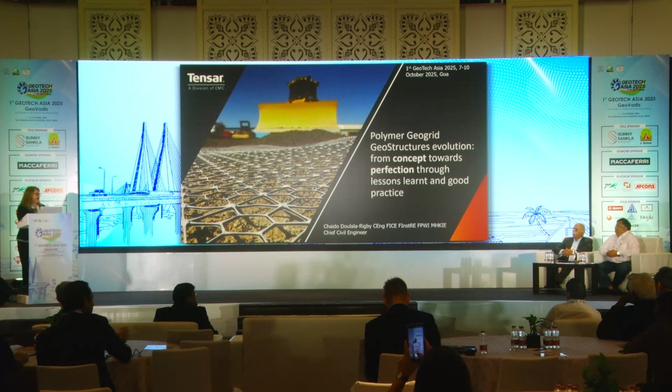So I'm going to take you from the beginning, where we started and where we are today. I'm a geosynthetics ambassador, I work for Tensar, and I have to mention Tensar because Tensar pays for my time being here. So let's go back to the beginning, from the concept of geosynthetics.

Everything we do in engineering, we mainly follow nature. There's an example of an aeroplane looking strikingly similar to an eagle, and another example of a submarine looking like a whale. Closer to our subject today, which is reinforcing or stabilizing soil, if we look at what the birds do, they stabilize soil with sticks of wood and twigs to make their nests.

So humans have been observing, and we started doing the same. We take clay, and in many parts of the world they still do that, reinforcing it with hay and sticks to create these bricks called adobe bricks, to build homes. In many parts of the world this technique is still available.

Of course all this concept of reinforced soil started way, way before. We have many historic examples of natural geoelements reinforcing soil. One of the oldest is the ziggurat walls in Mesopotamia, as it used to be called, in Iraq these days, where they reinforced loose soil with just reeds available in the area. Another example still in existence is the Great Wall of China, where some sections are also reinforced with branches of tamarisk to reinforce the soil.

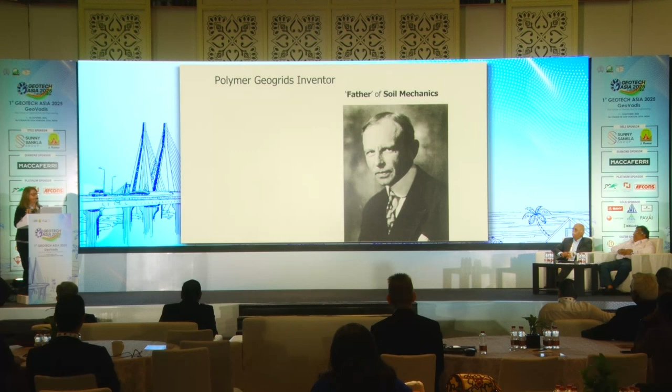I do a lot of STEM talks, and I go to universities to try to encourage students to use geosynthetics. The first question I ask students is, who is the father of soil mechanics? It's of course Karl Terzaghi, so all students know the answer. But when I ask who is the father of geogrids, there's silence in the room. So my purpose in life, until I retire and leave this industry, is to tell as many people as possible that the man of geogrids is Dr. Brian Mercer. This is a little bit of an unusual story.

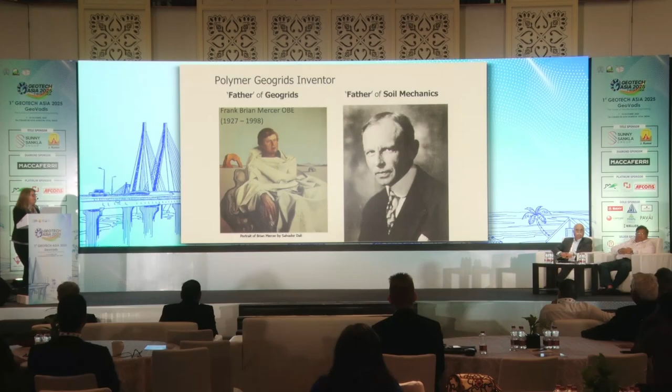Brian Mercer was a very good friend of Salvador Dali, and this is a photograph of the original painting that Salvador Dali did for Brian Mercer, I think 1973. Brian Mercer was elected as an honorary fellow of the Royal Society in the UK, and this is hanging in the room in Carlton Terrace in London, in a room named after Dr. Mercer, the Mercer Room. And this is a picture of Dr. Mercer with Salvador Dali talking about geogrids.

So, 1978, the concept starts - it's the very first, back in the day it used to be called the polymeric mesh, invented by Dr. Mercer. It was the first one, the square one, or biaxial, which now we see everywhere. This was invented in Blackburn, first time ever, by Brian Mercer - soil stabilization, SS.

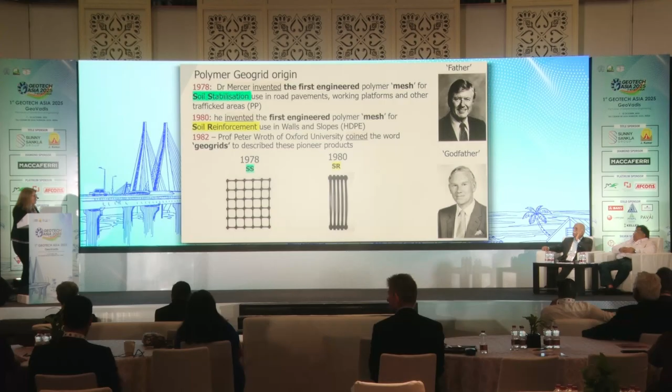1980 carried on, and then the second type of geogrid was invented, the uniaxial, with strength in one direction, for soil reinforcement. At this time it's still called mesh, because nobody knows what to call it. Then the godfather comes along, Professor Peter Wroth of Oxford University, and says, I know what we're going to call them - we're going to call them geogrids. So the name geogrid was given to the industry by Dr. Mercer and Professor Wroth from Oxford University, and I hope you didn't know that, so you'll take this away with you today.

So the title is The Origin, Evolution to Perfection. We've done the origin and evolution. So how did the uniaxial geogrids evolve? Well, there's nothing much happened to them - we just changed the length of the aperture to fit different markets.

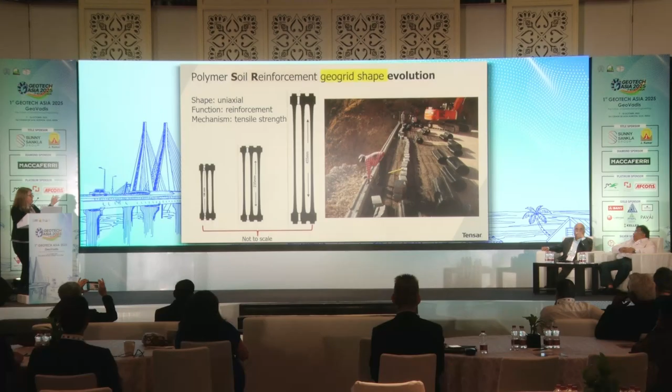Fast forward to 2010, and now we're building 60 meter high structures. This is a highway embankment in the Middle East, connecting Fujairah and Dubai, with a maximum height of 60 meters in three tiers, 20, 20, and 20. It's so big you can see it from Google Earth, and that's what you're looking at here. And if we look at the picture of this, is this.

How about design evolution? Well, the design evolution developed as well. In the 1980s, when we built the first structure, there was no British standard. The first design standard for reinforced soil structures, I believe, started in the UK with BS 8006, for whoever is familiar, but it was only published first in 1995, and now we're down to more revisions. Other countries adopted or altered the code to fit their market - so we have the Hong Kong GeoGuide 6, the American standards, Australian standards, and also the Indian standards on reinforced soil.

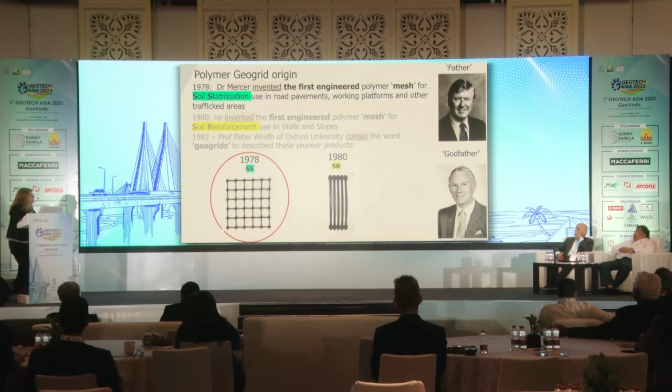So that's reinforced soil. How about soil stabilization? How did that evolve? Well, that's a different story. When we first - I was not with Tensar back in the 1980s, I was still at school - what the engineers did, like every engineer, was look for the tensile strength, because that's the natural thing to do. So of course we tested for tensile strength and put this in the standards. I believe many DOTs in America still use tensile strength. But in parallel, because this is mainly for traffic applications like roads, working platforms and railways with dynamic cyclic load, we thought let's follow what AASHTO does and try some trafficking as well.

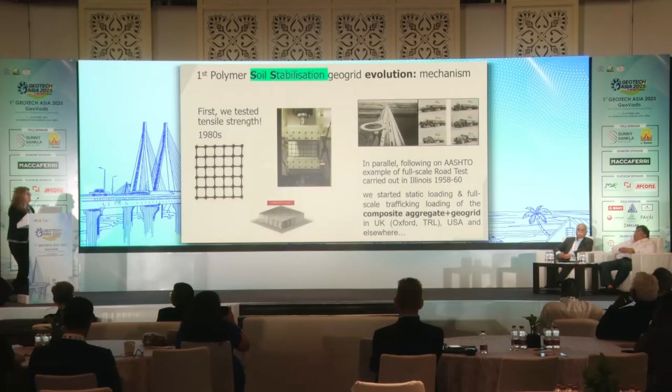Let's try to see how the composite aggregate and geogrid behaves. Since the beginning to now and beyond, because we're still developing, evolving and learning, our geogrids have been tested in many parts of the world. So whatever we say is very well documented, and that's how it should be. Innovation and evolution is very welcome, but it needs to be backed by very rigorous scientific justification. And in many parts of the world, this is the current research we are undertaking.

The lesson we learned, it's more like a discovery, is that soil stabilization mechanism is different from soil reinforcement. The inventor of geogrids knew that from the beginning, that he had two different products. Soil reinforcement is about tensile strength, whereas soil stabilization has to do with shape, geometry, and the ability to interlock the aggregate.

As we developed and evolved, we realized that wheel loading, mainly for trafficking applications, follows a 3D radial distribution. So we thought, what if we develop our geogrids to a shape closer to a circle, the perfect stress distribution? That's how we came up with the hexagonal geogrid in 2007, evolving what our inventor started.

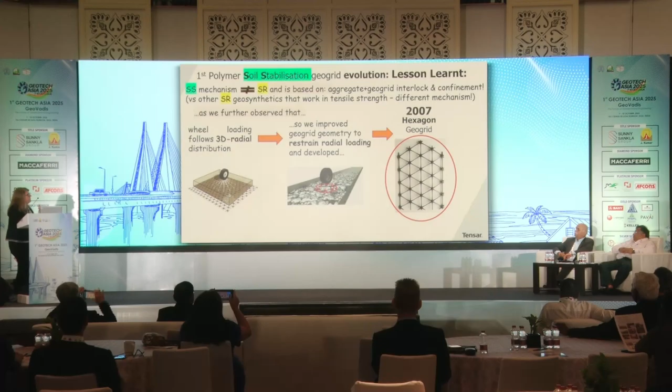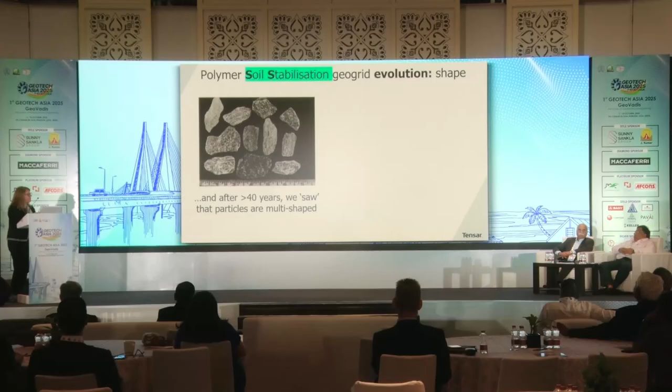But we carried on observing, because we keep on learning, we're not there yet. It still surprises us what these products do. After 40 years of R&D, we realized the particles of the aggregate are all different shapes. So we thought, what if we give different shapes in our geogrids? That's how we evolved in 2021 to the next generation geogrids with multi-aperture structure.

By enhancing the geometrical compatibility, we enhance performance. The evolution of this type of geogrid is from biaxial to multi-axial to multi-shape, and who knows what's next, because there's always something cooking in the back burner of Tensar's lab. There's more coming, because we're still in the journey of understanding what our products can do, or what our future products will do.

And why do we do that? Because the main purpose is to increase aggregate confinement and interlock, because we realized that's what matters, ultimately to increase performance and value.

Just a quick example of what value means to us. This is a crane mat somewhere in the US. I won't go through the details, all you need to know is the conclusion. At the time it was the third biggest ringer crane in the world, I believe. This was the cover page of our first e-bulletin of the ISSMGE.

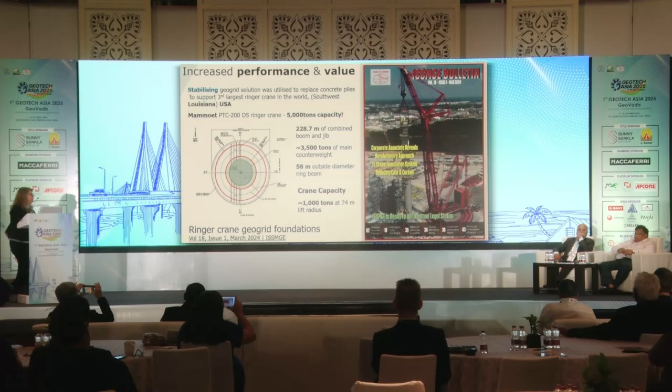The conclusion is that with geogrids we replaced 200 piles, 20 meters long. This was a temporary working platform for a crane, and the conventional design called for 200 piles to support it. We eliminated all 200 piles with just 5 layers of geogrid and a 1.8 meter mattress.

So what does that mean? Carbon is one thing, but money talks, right? Money is the big daddy. We saved the contractor 3.1 million. This is done and dusted, that was in 2017. We did it, and there's a paper for whoever is interested.

So, to the conclusion, what have we learned towards perfection in practice? I'm going to give four examples: reinforced fill, compaction, site investigation and foundations, and drainage scour protection. I could talk for hours, but I'll concentrate on these four.

Reinforced fill: our structures are a recipe, just like anything else. With reinforced concrete, if it's C40, you have to give the correct amount and type of Portland cement to reach C40. Our structures are no different. So here's a reinforced soil bridge abutment, an integral bridge.

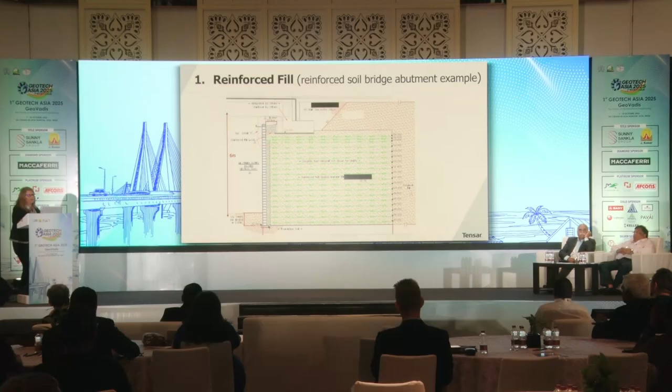Mitchell, the mastermind, my colleague, designed this: 6 meters high, very conventional. We're fighting the industry to adopt reinforced soil because it's so much cheaper, easier, and carbon friendly. We specified the reinforced fill because it's a bridge abutment, so we need the best fill available: well-graded granular, angle of friction of 42.

What do you expect to see on site? Something like this, very good quality aggregate. What do we see on site instead? This.

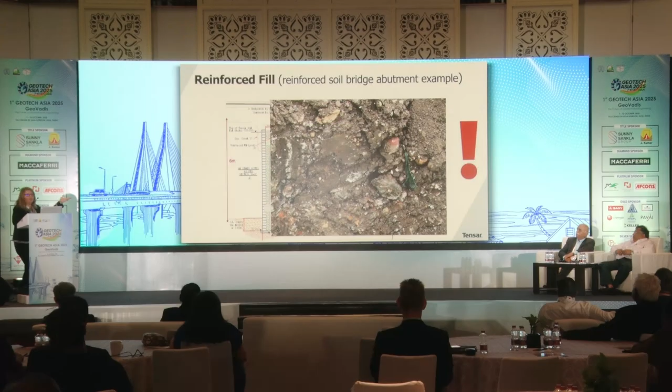We had to raise our voice, and it was shocking because the specifications were clear. This is a project in Great Britain, and the specifications were not only not followed, it was incredible that they would provide this as granular fill to meet an angle of friction of 42. Thankfully we found out and raised our voice. Lesson learned: if it doesn't look right, it's probably not right, speak up. We're a small manufacturer and provider, and we have to deal with a big contractor.

And there's always this disclaimer to say 'filled by others.' It doesn't matter, it's still our design, and we've got the professional duty to warn. Whether it's within our contract or a caveat of exclusion, we raise our voice and say stop. Thankfully, that's what we did. Lessons learned: follow the specs. Like I said, it is a recipe.

It was demolished and rebuilt with the proper spec. So I shouldn't complain because Tensar got twice the sale, but that's not my point. My point is we don't want any of the structures to fail. We want to do the right thing.

Compaction. Everybody knows why compaction is good, but I'm going to give you a different angle. So this is during construction. Accidents happen, and we know that. This is part of the big walls I mentioned, and right at the boundary where the new contractor took over, they don't care about our structure, so they're quite rough.

So what happens? This big boulder falls down, and imagine we're 40 meters down already - no, about 50 meters down. The impact of this boulder, which is about 4.5 by 3, is massive. So what did it do? It created a big hole.

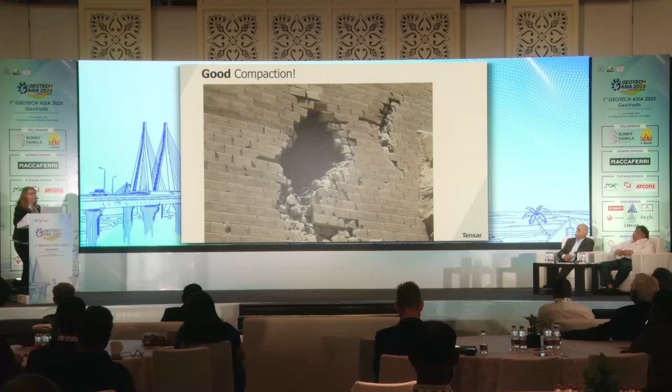I don't know if you can clearly see the geogrids and the soil. The geogrids are doing their work, and they're doing it perfectly because the construction in this project was perfect - the face of the soil is vertical. But of course we need to fix it, because the concrete blocks are just there to protect against long-term erosion. So what did we do?

We built a buttress in front of it. So this is the buttress - we plug, and this is the end of the buttress. This is the before and after. It was a very neat solution. This buttress is 10 meters high. Yes, we can fix it because structurally the wall had nothing wrong with it. And of course we made it look pretty as well.

What happens when compaction is not there? There's another photograph that landed on my desk saying, can we fix it? What do you think? If you look closely, you can see the sun coming through because there's a massive hole all the way to the top. Clearly, all the granular materials and drainage just poured out - that tells me the geogrids must have been missing. Never mind, no compaction - so compaction does matter.

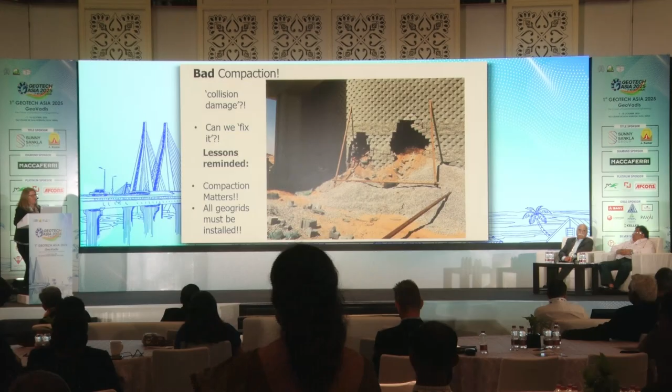The answer to that was no, you have to demolish it and start again. That's the only solution. All geogrids must be installed, and compaction does matter.

Site investigation and foundation - here's another example from somewhere in the world. Doesn't matter, it's a 12-meter high wall, dimensions in centimeters. In this part of the world, the site investigation is done by others and given to the geogrid designer - so no control. Slope height 12 meters, face angle 60, the SI undertaking had no boreholes for a 12-meter high structure.

Just a few trial pits finished at 2 meters, and they found silty clay and no groundwater. Happy days - they gave the bearing capacity, and the wall was designed for what it was given. The only foundation remediation was where the trial pit stops: excavate and replace 2 meters. What have they missed? Well, obviously, they missed the groundwater level, which was just below.

And a very, very weak soil layer with the consistency of plasticine - like a kaolinite seam or something. So what? Well, take a closer look. This is the actual embankment, which was to carry some electrical equipment. It looks beautiful and perfect, but what's going on there?

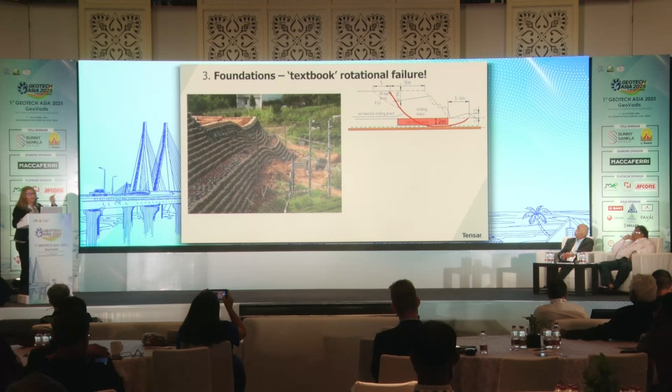Take a closer look - the whole thing is slumping, and you can see the slip circle. I call it textbook failure - exactly what you'd expect to happen. Of course, they remediated the foundation, excavating and replacing the 2 meters, but they missed the weakest layer. That's exactly what happened.

So there's the crater at the crest, 3 meters down, and then what happens as it goes down? It comes up - sorry, there's another one, good scale with the people. The toe comes up, right? The bulging at the toe was about 1.5 meters. Like I said, textbook failure. And of course, water was the culprit of it all. So what happened here - they had to take that away and replace it.

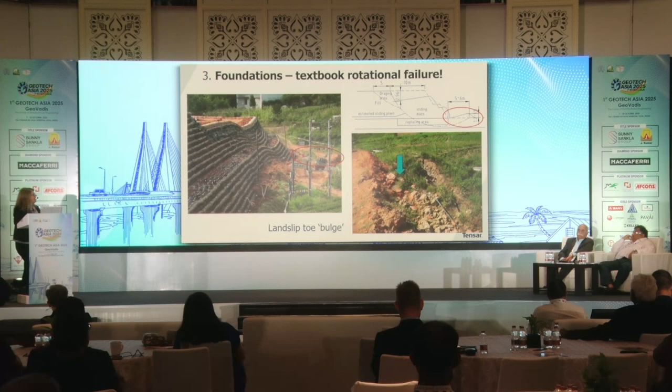Lesson learned: carry out appropriate site investigation. It needs to be proportionate to what you're putting on top to support - not just shallow trial pits for tall structures.

Carry out appropriate foundation - it's not one solution fits all. It needs to be bespoke to your structure and your geology every single time. Many people say you're going to pay for the site investigation at some point of the project. The best time to pay is at the beginning, because if you pay afterwards, it's going to cost you a lot of money, and sometimes it might cost lives too.

So please, don't skip site investigation. One last comment: drainage. Why is drainage important? This is an extract from the British Standard - it shows that drainage must not daylight, it must be buried under the soil. So we always put the end of the drainage at the top, buried at least half a meter below the surface.

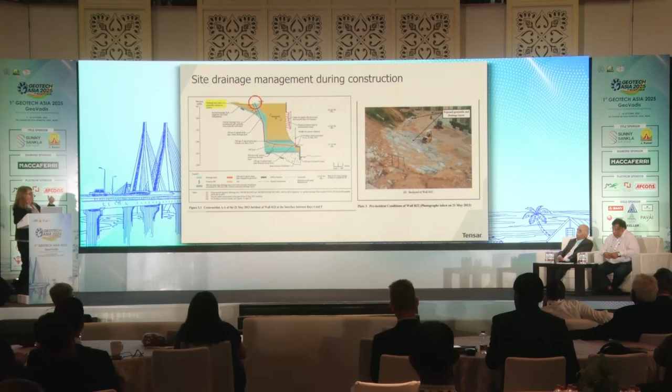Why? This is a well-published case study from Hong Kong. This was during construction. They stopped for the weekend, a typhoon came, but they didn't cover the drainage. So this drainage at the top acted as a funnel, taking in all the rainwater, and because the foundation was concrete, there was not enough drainage for the water to go through. So this is what happened.

It popped the face, and the conclusion of the report said the surface water accumulated at the drainage was the reason for the failure. So the lesson learned: consider drainage at all stages.

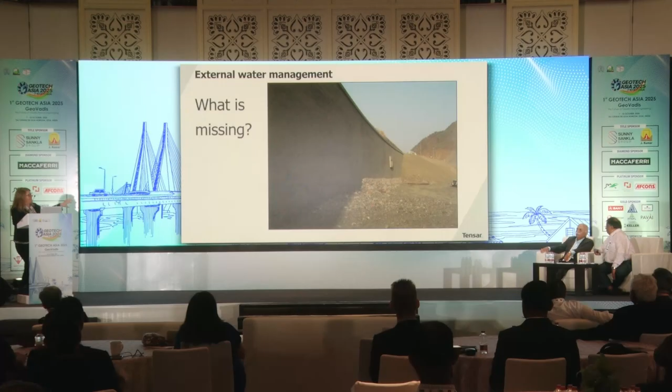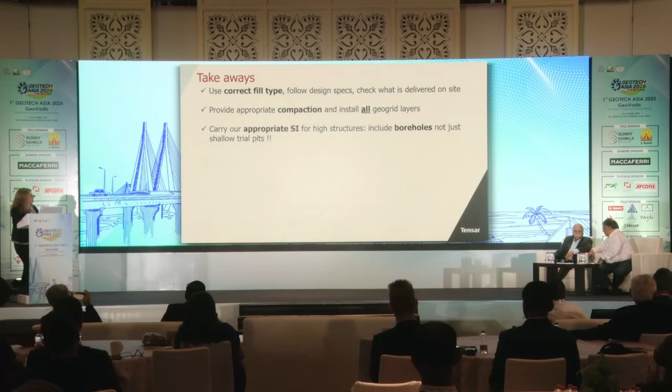And finally, be open to learning and keep an open mind towards foundations, because evolving towards perfection is a lifelong learning journey. As our civilization - because I'm Greek, so my civilization is as old as yours - in Greek we say 'gerasko aei didaskomenos', I grow old always learning. I cannot read the Indian, but basically your Gandhi said, learn as if you will live forever and live like you will die tomorrow. So in essence, never stop learning, because knowledge has no limit.

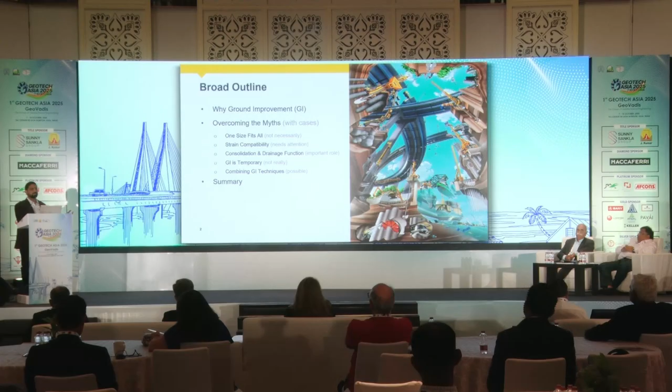How important it is to have strain compatibility in design of the ground improvement techniques. The consolidation and drainage factor is also one of the very interesting aspects for the full-fledged performance of the intended design. Ground improvement can be designed as a permanent solution, not temporary. And of course, sometimes you have to combine techniques to suit varying soil demands and geotechnical applications. So I thought to cover some of these aspects, but also give real examples to substantiate through case studies.

I'm sure you're all aware of this fundamentals of ground improvement. It's all about controlled alteration. It's not a product to make things happen in the ground, but it's all about the controlled alteration. And of course, the response is what we want out of the engineering actions. It's not textbook actions, because ground improvement is more theory of practice than textbook formulas.

You can see some of them are all basically connecting to the basics of physics. Sometimes it's consolidation, sometimes it's modification chemically, and sometimes as simple as densification when it comes to vibro compaction, and the reinforcement, very commonly known as vibro replacement or vibro stone columns. And of course, there are other techniques.

In the flow chart, what we believe in Keller is the whole thing is like a life cycle of the project. Right from the design intent, you have to understand the geotechnical complexity and problems involved. When we get into the design phase, you have to take into account even availability of materials, constructability, and what time is given, what rigs are available in the market.

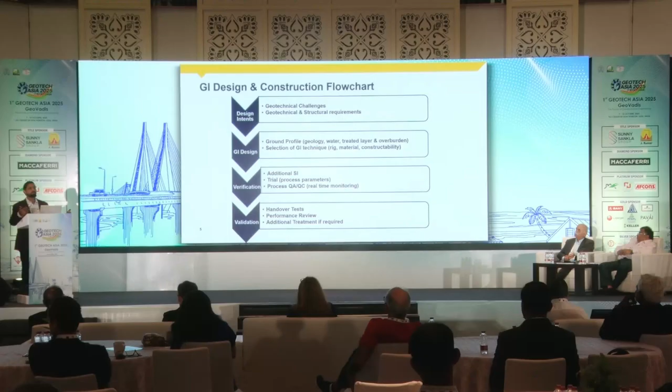So some of the myths, I wanted to break those myths and try to attempt in this session, and try to bring those myths connecting to the facts based on real case studies. The common myth is like, again, I just wanted to cover all these 5 topics.

It's not that one technique fits all geotechnical problems. You need to have the right technique. For example, even as simple as the densification technique - the right technique in terms of depth, in terms of fines content, and the strain compatibility when it comes to discrete elements. That's very important when it comes to slope stability and liquefaction applications.

Drainage, whatever we wanted to achieve through right consolidation, the drainage aspect can never be ignored, and how it can be designed as a permanent solution, not just temporary, and sometimes the combination of techniques.

The first one, touching the first top 2 rows. We do a lot of reclamation projects in Southeast Asia. In these projects, we have to ensure the fines content, how clean is the sand, what is the calcareous content sometimes that you have in reclamation projects.

You can actually decide on vibro compaction or dynamic compaction, depending on the depth, depending on the water table. And when you deal with soft clays, you also have to take into account whether sometimes there is any organic content and decayed wood. That is also important when you choose to have a reinforcement technique like vibro stone columns, or sometimes you have to go into deep soil mixing.

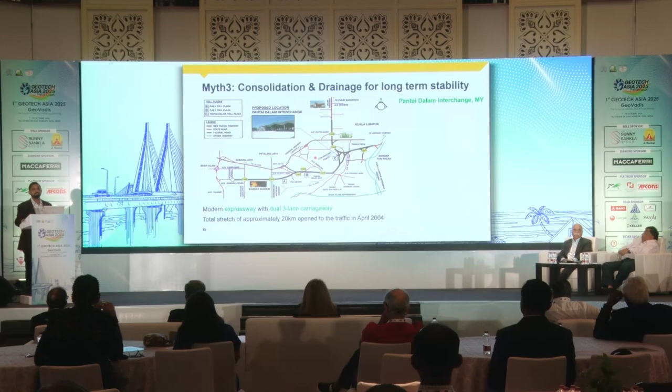Moving on, the next important aspect is the drainage and consolidation application of soft clay behavior. When I was a young engineer in Malaysia, back in 2004, this case has been there for the last 20 years - a very interesting case study for us. This is in Kuala Lumpur, and the soil here is called slime. Slime is nothing but very soft, ultra soft silt with some sand content, but very soft. Shear strength sometimes goes as low as 8 kPa, and maybe as high as 25 kPa.

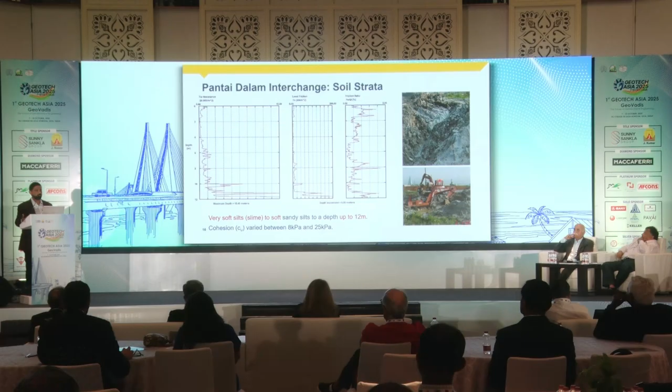You can see how badly even a 20-ton excavator sinks into the ground, so you cannot take that kind of weight. Now imagine putting a huge reinforced soil wall, 13 meters high, for this interchange - how is this going to work? We're talking about 260 kilopascal. It's just not possible without the right soil improvement, ground improvement technique.

So what we've done is optimize the elements with closer spacing and a higher replacement ratio to address slope stability, and you can optimize at the center of the carriageway of the highway since that's more about settlement - being an RSW, you can tolerate even 300 millimeters of settlement as long as it's constructed rightfully. Stability is then ensured with the right factor of safety of 1.4.

But what's more important is the drainage layer. The drainage layer ensures the right consolidation behavior of the soil as it gets filled. This is a very interesting instrumentation monitoring program, run for almost 3 years.

What's very important even in the construction phase - for 13 meters, we took 13 weeks to build the embankment, that's almost 1 meter per week. If you accelerate this, trying to get it done over a 1 month period by building 3-4 meters every week, that can also cause a lot of problems to the soil.

So it has drainage elements, drainage layers, all nicely connected. But you need the right sequencing of construction to ensure the whole performance is achieved in the rightful direction. And you can see the wall still performing nicely for the last 20 years, since 2004 - a 13 meter high RE wall working very well.

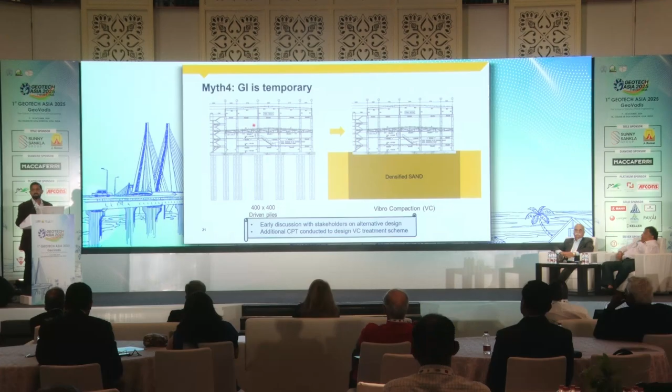This one is very interesting, a rubber factory in Jurong Island, which was originally designed to have driven precast piles. We converted this into a vibro compaction technique because we found the sand, though reclaimed, was good enough but not having the right densification.

At the client's request, we monitored this for about 7 years, and the whole factory was found to have just 32 millimeters of settlement after the right densification of the loose sandy deposits. The factory was designed for a raft performance settlement of 50 millimeters, so we changed from a very expensive piled solution to a ground improvement solution.

The last case study I wanted to touch on is about sometimes getting into surprises with soil. That's why it's very important to have confirmatory soil investigation for every ground improvement project, or every foundation application per se.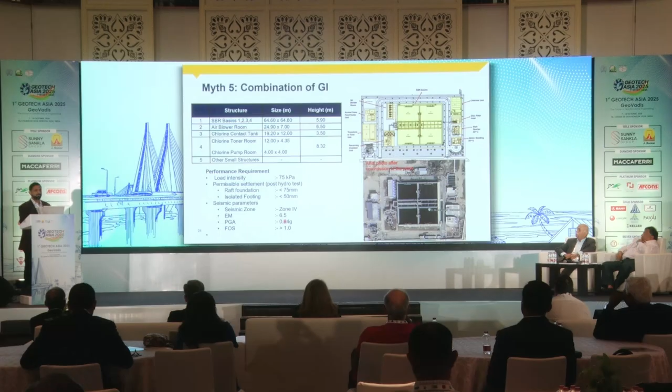I'm not going into the details, but the main application is liquefaction mitigation with 0.24g and a magnitude of 6.5, and how we actually validated the soil confirmation. At the tender stage, it said the liquefaction depth was only 10 meters, but when we did the confirmatory soil investigation, the liquefaction depth became 17 meters.

Sometimes you are in a design-and-build or lump sum contract stage. How do you deal with this? One other interesting thing we found was that unlike the top 6-7 meters, which had higher fines content around 20%, the bottom was relatively clean sand, river deposits from decades of sedimentation.

We wanted to optimize by combining techniques rather than sticking to just one, because a varied soil profile complicates your geotechnical design, but it also lets you optimize the solution by combining two different techniques.

So we used vibro compaction at the bottom layers, like the bottom 10 meters depth, where there's less fines content, suitable for a densification effect to address liquefaction mitigation. But at the top, where fines content is more, we used vibro stone columns, because one solution doesn't fit all problems. You need to switch to vibro stone columns where the fines content is higher, which causes more reinforcement effect and good enough drainage to mitigate liquefaction.

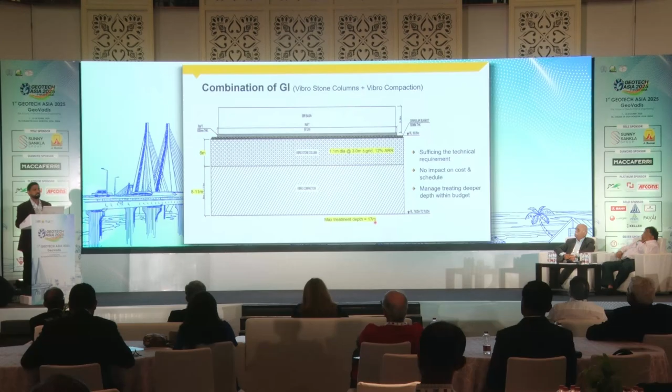I'd like to summarize now using these case studies to bring some facts and break the myths of some of the misconceptions we face in day-to-day life. Firstly, ground improvement is just not one size fits all for geotechnical problems. The complexity and variability of the soil, and different performance criteria for different structures, place different significance on the geotechnical design. So we need to engineer the solution and not assume one product fits all problems.

The second point is that focusing on addressing strain compatibility becomes even more critical. If you're transmitting all the loads through deep foundations, strain compatibility may be less important, although even there you need soil-structure interaction compatibility.

But here, discrete elements, sometimes rigid elements can be rigid inclusions, can be deep soil mixing, especially for applications like slope stability or liquefaction-induced mitigation problems. Then you need the right overlapping techniques, the right grids, and the right understanding of the complex design before execution. Then it is possible to combine different techniques to suit varying soil conditions, giving leverage on optimizing cost as well as time.

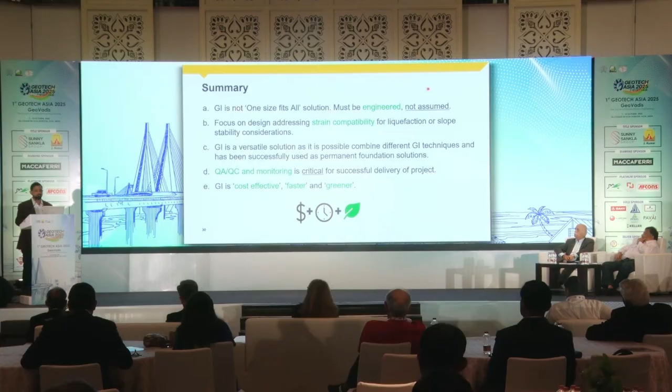Overall, I conclude by saying ground improvement can be cost effective if you design it well, faster compared to conventional solutions, and it's greener by having the right carbon savings. Thank you very much for your time.

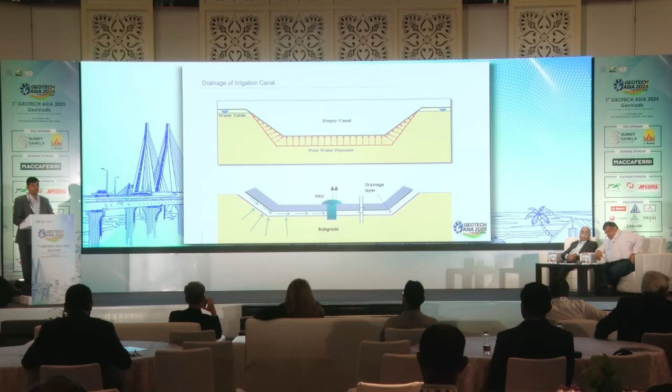A canal is of course a very nice structure, but in case you have a high water table and an empty canal, you have issues with linings—this was the case in the states of Punjab and Haryana, since those are the two states with the biggest canal irrigation system. Usually we provide a drainage layer at the bottom. Or, as we're talking of ground improvement, you have excess water, pore water pressure, or sometimes we need to build the structure on it—so strengthening plus drainage, both parts need to be taken care of.

Landfills, of course, involve draining of liquids as well as gases, which is part of your bottom lining system or top lining system.

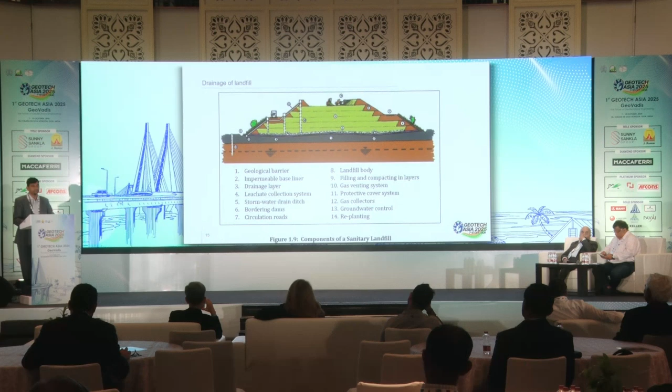Pavement granular surface layers, be it a flexible or rigid pavement, can have a daylighted granular surface, or you have situations anticipating a lot of floods where you want to keep your subgrade dry, so you go with conventional open drains or trench drains built with gravels. In case stagnant water and fluctuation means capillary rise cannot be avoided, the conventional solution is placement of sand, typically 150 to 300 mm, which will cut off the capillary rise.

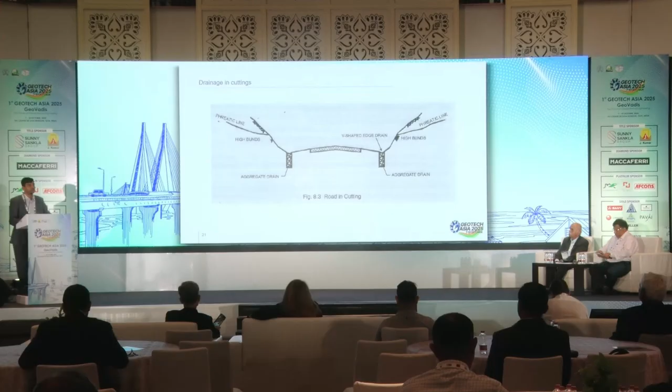Or you have a situation where pavement is in a hilly area, again rising groundwater is an issue. You have trench drains, typically in cuttings, especially in the Himalayas or Western Ghats, where you have constant sinking and pavement issues because of the phreatic surface being cut. Sometimes we have infrastructure close to irrigation canals, and there too you have these issues.

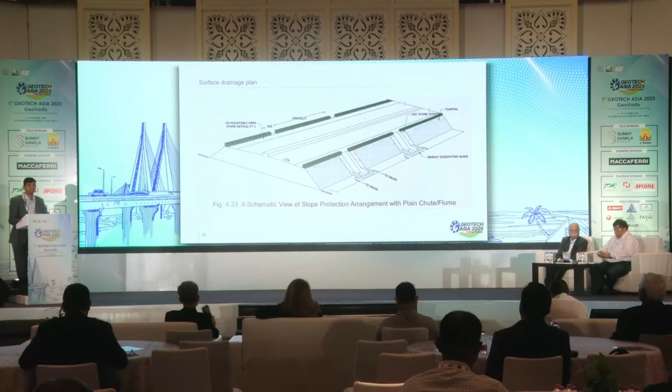Apart from subsurface, there are surface drainage measures using chute drains, something like this when nicely done. Even big structures like dams, small or big, use chimney drains. These are some pictures from the International Geosynthetics Society showing multiple applications of geosynthetics as part of drainage.

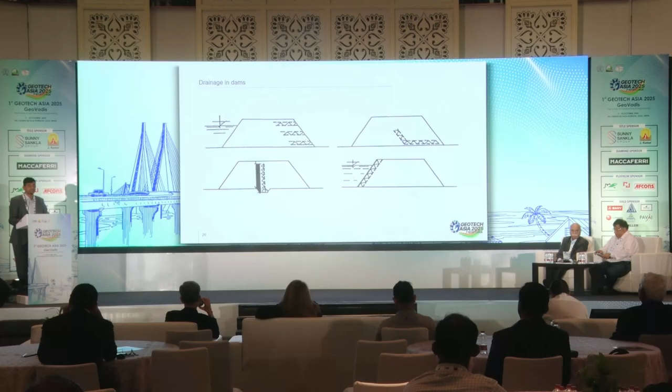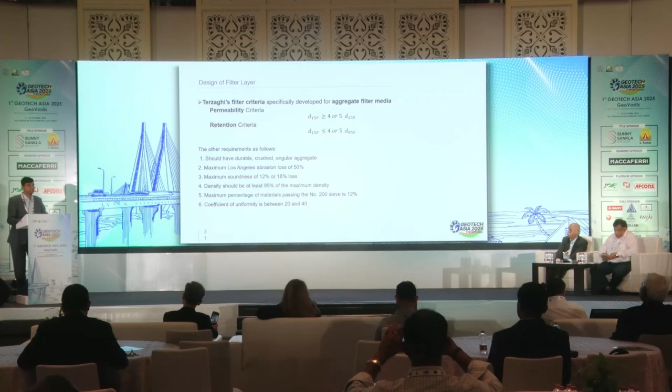We will dwell on what these mean - hand-packed boulders and well-graded layers. I think we need to go back to basics when we talk of drainage. We know the filter layer, how to design it based on the base layers or soil available. Nice designs can be derived based on D15, D85. Then you have curves where you can look at the gradation of the base or core material as well as suitable filter material to choose. I am not going to go into the design of this.

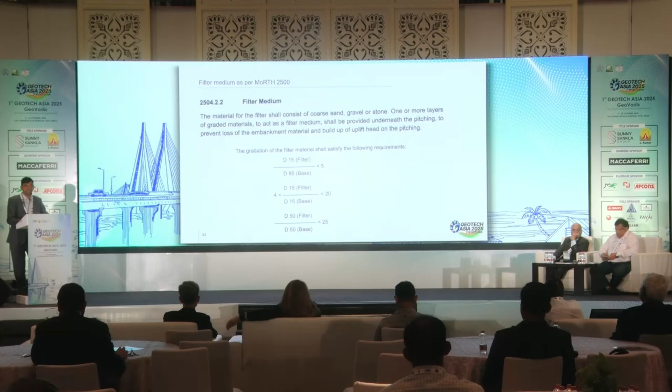My point is, even if you do all these calculations, what it needs is a drainage layer having certain gradation placed in a certain pattern - inverted drainage layer, sometimes open drainage layer, depending on what type of soil you want to retain. Then, of course, you have curves for textiles where you can look at the opening size and derive it.

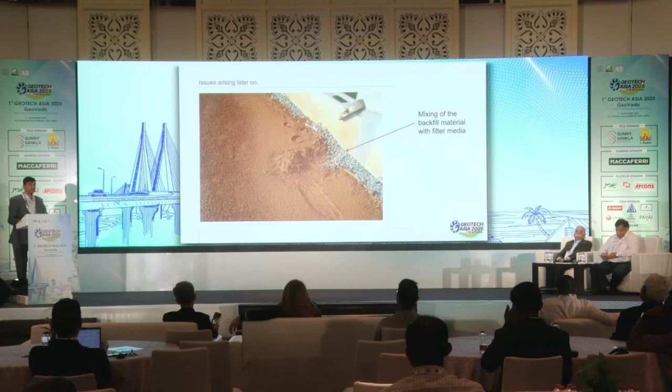But how often have you seen installation of a drainage layer with the gradation that was actually designed? At least, unfortunately, being a civil engineer, I need to admit, in the last two decades I have not seen this done so seriously. Some portion it's being done, and some structures I have personally seen how it's done. Most of the time you will end up with something like a single size drainage layer being placed with the soil, and what the life of this drainage layer will be over time is to be seen. On top of that, there are issues of banning mining for sand and gravel, specifically happening in India in certain parts.

So when it comes to solutions, drainage composite is one option, where you have a product with a textile, a drainage core, and on the other side maybe another textile or a membrane. The functions it performs are drainage, apart from filtration, separation and protection. You can have variety of drainage composites with only one side textile, both sides textile, or one side geotextile and the other side membrane. The reason I put these basics is I have seen in university sometimes people using only one type of drainage for many applications.

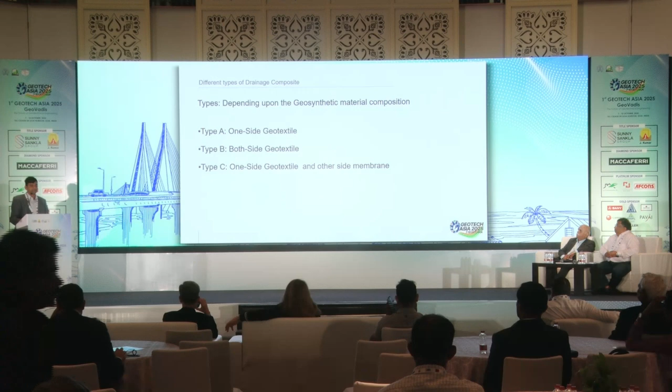Subject to whether you have a proper geotextile or a proper conventional drainage being designed. When we look at the conventional method and the geosynthetic drain, we are looking at criteria like...

Graded filter: in geotextile, you can actually customize, you can manufacture the textile by choosing the apparent opening size. Whereas in case of conventional filter, you can do it, but you will need to construct it that way. Quality, of course, depends on the source from where you are mining the minerals or the drainage layer.

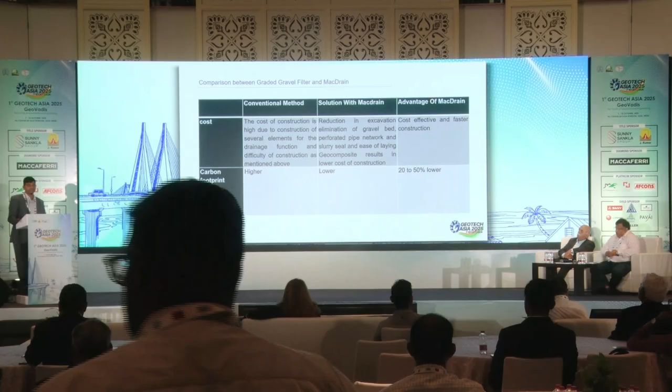Geotextiles are a part of polymeric materials which you can consistently build, and ease of construction is very easy. Cost, obviously, from different states and parts of India, we have seen it can range 20 to 40% very easily. And carbon footprint of this solution is very low.

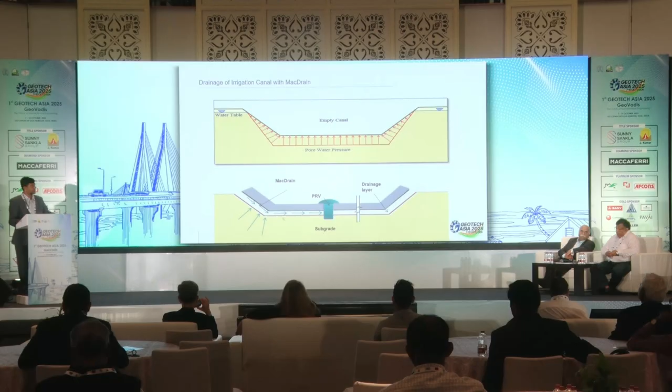This is one case of a canal where you can provide a drainage composite at the bottom, especially critical when you have a very high water table and possibilities of cracking of the canal lining.

Or PVDs, as a replacement of conventional sand layers or gravel layers. Or you can use a geocomposite in the pavement layer, especially for areas even for frost susceptible soils. Here you will need a slightly different drainage composite compared to other locations.

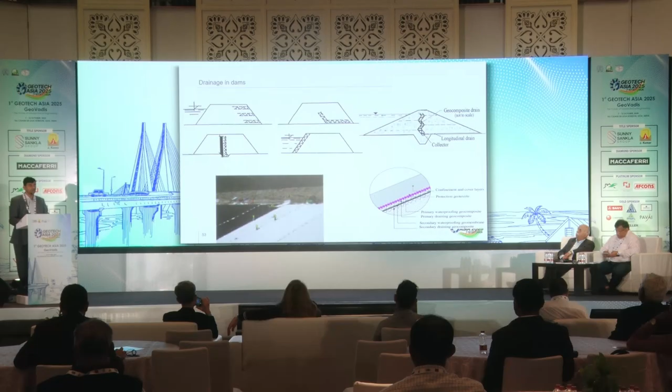Or you can look at drainage composite for cuttings. All these sketches I am showing are part of the norms and guidelines now in India. Or if you have a cut and cover tunnel, you will need to provide a drainage composite on top. Retaining walls, of course, would be one requirement to design for these applications.

When it comes to the application of design, whether it is landfill where you are dealing with leachate, or retaining wall where you are dealing with natural soil and water, or pavement, the applications are different. So here we will first need to understand these boundary conditions and then design.

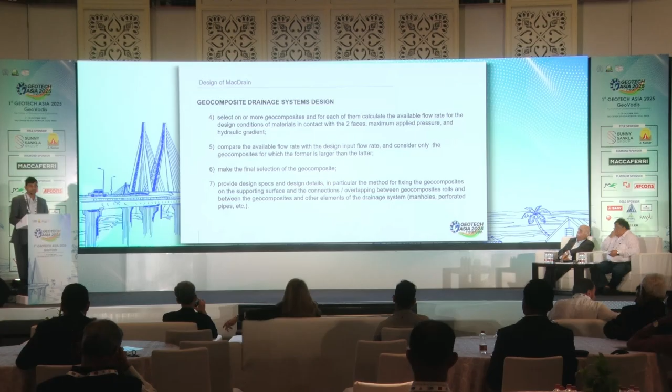Here you can choose the drainage composite based on the flow rate, and when we talk of the available flow rate, we will need to see the conditions through which it's going to be subjected, with a design like what you will see.

I have just put one simple example of a retaining wall. In case you want to estimate how much flow it will accumulate at the top, you can just go by first principles of equipotential and flow lines and calculate the flow. The drainage composite or geocomposite drain must have a higher capacity than what the flow is expected.

Keep in mind the drainage composite needs to be compared with the conventional option, maybe based on the type of gravel you want to put. Take the K value, and Q equals KIA, from that you can calculate the flow.

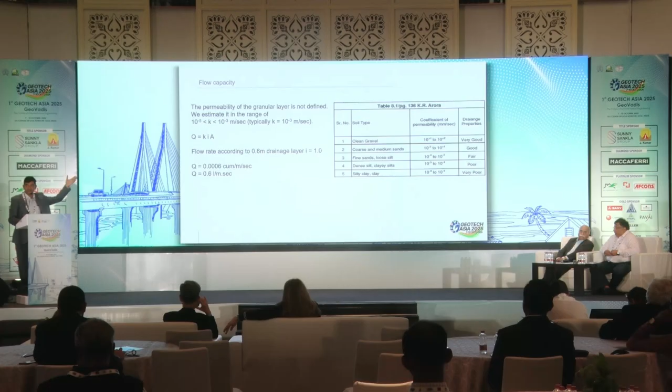So for example, if you take a 0.6 meter drainage layer, as specified in various norms, and let's say a vertical wall with a gradient of 1, maybe 0.6 liter per meter second is the flow you are looking at. Now for arriving at the flow capacity, you can choose a drainage composite with a testing as per ASTM or EN ISO.

You will get a flow which is determined from the laboratory. You say the QL is the flow from the laboratory, and then you will need to understand the available long-term flow. The long-term flow will depend on the life of the structure.

So the question will arise, how does it matter whether it's 20 or 50 years? Because the drainage composite will be subjected to creep, it will deform, it's a synthetic material. The textiles will deform over the drainage composite layer.

So intrusion of geotextile will happen. Then you have clogging. If you are dealing with a landfill, there is chemical clogging. If it is a retaining wall where you are subjected to rainfall, not expecting much difference in chemical composition, then biological clogging needs to be seen, both chemical and biological clogging.

The important part is to take care of all these factors and then choose the geocomposite, not just the value coming from the laboratory compared to the input. On top of that, a very important factor, FLR, is an empirical factor which needs to be applied, because in the field there are a variety of conditions, but it's not possible to test the composite for all of this.

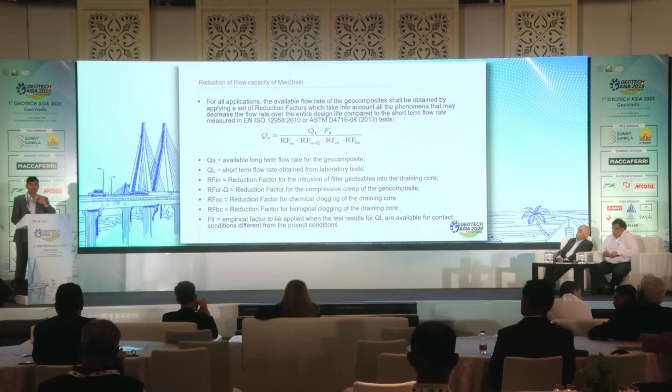You may test for one condition and extrapolate to the other condition. For that, the FLR value can be applied. For example, I have tested a drainage composite with one side a steel plate, other side rubber, simulating a concrete retaining wall, because concrete is rigid whereas soil is soft, so there will be a geotextile intrusion. But in case I have to use it for soft condition, you can do that using this FLR factor. So this is what you can follow as per ASTM for various loading conditions, and the gradient you can choose.

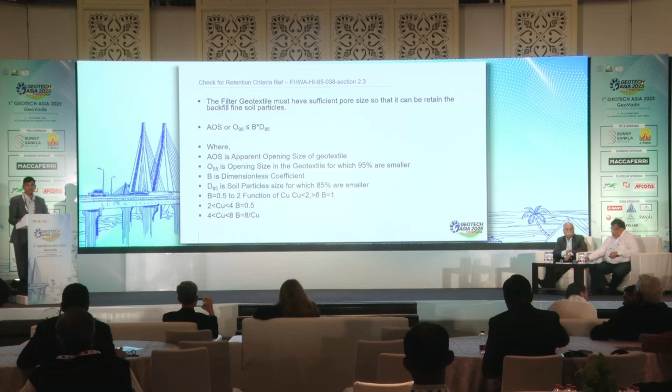And of course, a very important part, the geotextile will need to be designed. I will leave a copy of the presentation. I will not go into details of this design, but I would like to point out one aspect.

Many times I get a question: why can't I use a very thick geotextile, 500 or 1000 grams per square meter? You need to understand there are curves from the Koerner's group on geonet properties and geotextile properties. If you subject it to a certain pressure, let's say 50 kPa, the performance of the geotextile in plane flow is quite different than the drainage composite core. That's why the drainage composite is best suited rather than going for a very thick geotextile.

A case study, very quickly, from the state of Haryana. This is a canal lining which feeds a certain part of the city and irrigation too. The ground water table was very high here, and we provided a solution with a drainage composite.

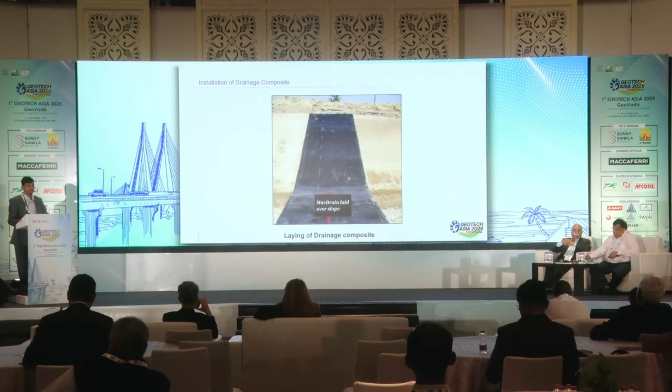The black color sheet you see is basically a membrane, and on the side in contact with the substrate is a geotextile. This is the initial site condition in 2009. There were a lot of issues in terms of the lining getting cracked, and what you see in the photograph is that they dressed it up first. After removing it, four years after construction, in 2013, we took this photograph, and the authorities of Haryana Canal are really satisfied with the performance.

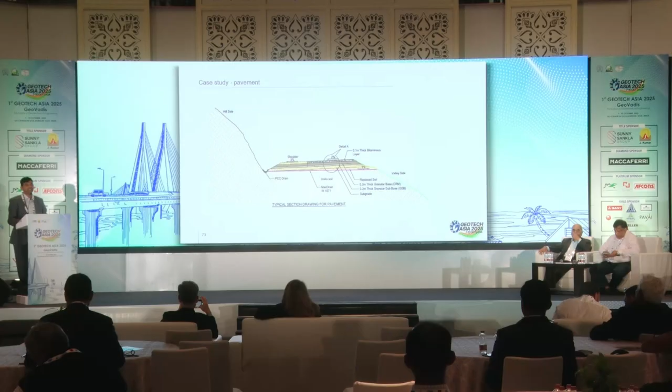This is a very interesting case. Again, due to confidentiality, this is a border road project in the Himalayas for security forces, at very high altitude. There was a patch of road they had treated for almost two decades, but every year they had to go and redo it. The engineer said we need to look at the drainage part of it. Here we installed the drainage composite, taking care of the parameters I have discussed, and this is during daytime when temperatures are -10.

And this is summertime, what you see. Here, of course, the installation of the granular surface layers on top of the drainage composite was done. After the installation, it's been almost 6 years back. We have had no news - no news is good news, right?

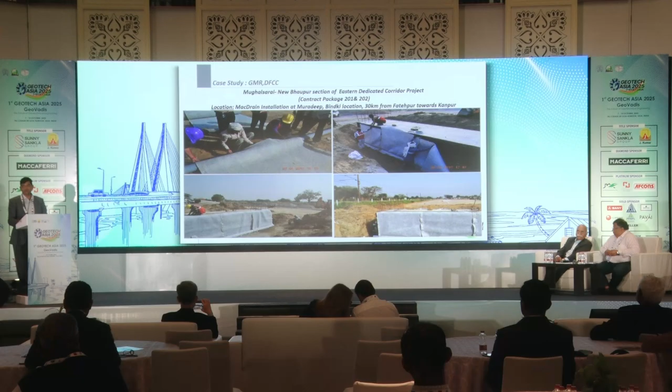For your information, the LHS, they call it the low height subway. Here it used to take almost a week's time to place each boulder, hand-packed as per specification, whereas with a crew of 4 people, they could complete installation in 1 day for one LHS. Some photographs I captured because we did field trials to show them how it is working.

This is a video from the northeast part of the country. Very heavy rainfall, and at the backside it's shales. Shales require drainage, so here drainage composite was provided. The right video shows basically behind a retaining wall, a drainage composite was placed of a 10-meter high retaining wall, and then it was flooded with tankers to test.

After gaining confidence, contractor L&T and the authorities agreed for this kind of solution. For your information, now railway standards in India allow use of drainage composite behind retaining walls.

This is information related to the drainage composite. If you take it behind a retaining wall, you are looking at maybe 1 truck of drainage composite, which is equal to 150 trucks of gravel. So it's not only the cost of material, but look at the environmental saving we are looking at. Mining is limited.

One minute more. Yeah, sure. Done. So, in summary, this is a better material, a proven material.

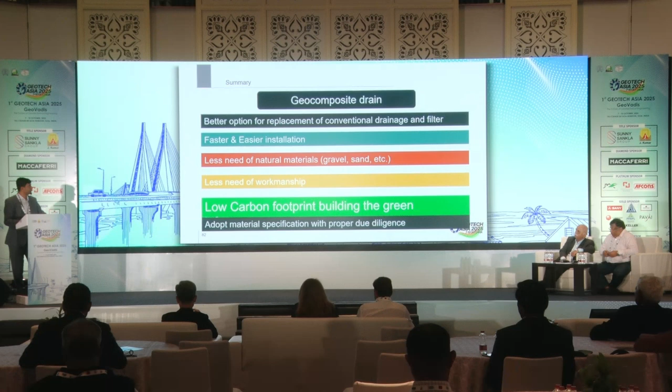Of course, as I said, we need to understand what environment we are working in. Number of factors like creep, chemical clogging, biological clogging, intrusion of geotextile sediment need to be seen, low carbon footprint, building the green infrastructure, and here you need to have due diligence.

Of course, all this is aligned to the Sustainable Development Goals. We are looking at 8, 9, 11, 12 and 13, looking at material savings, outstanding performance and faster installation. My message is that it's time to adopt this drainage composite extensively.

Nowadays we have the international standard ISO which is coming up, it's in draft stage - ISO 18228 part 4. Apart from that, Indian standards are available. With this, thank you very much for patiently listening.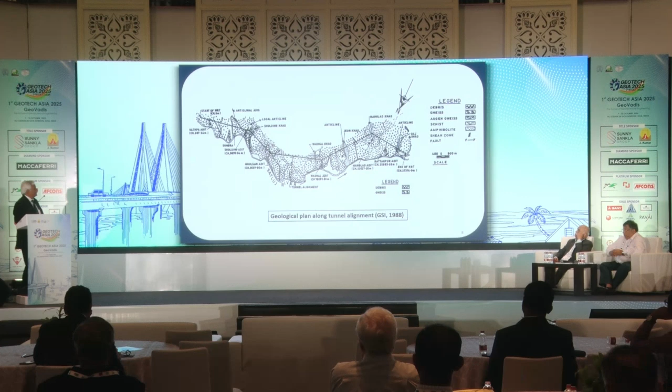Now, I will not be going into the details of every zone, but you can see the majority of the rocks are medium to coarse grained gneiss, quartz mica schist, and you will find there are anticlines, synclines, shear zones, and because of that there is the possibility of squeezing ground conditions also in different regions of the tunnel.

So this is the geological section along the tunnel alignment. You can see from the Nath adit up to, let's say, the Mangalad left bank adit. You will find all the joints are inclined in almost all arbitrary directions, and also we have got different thicknesses of shear zones, so it makes the construction and also design complex.

Now, in case of the determination of the support system, what we do is actually start with the rock mass classification systems, and there are a number of rock mass classification systems available. I agree with the previous speaker that one size doesn't fit all for all the cases. So similarly here, one rock mass classification system doesn't fit all the cases.

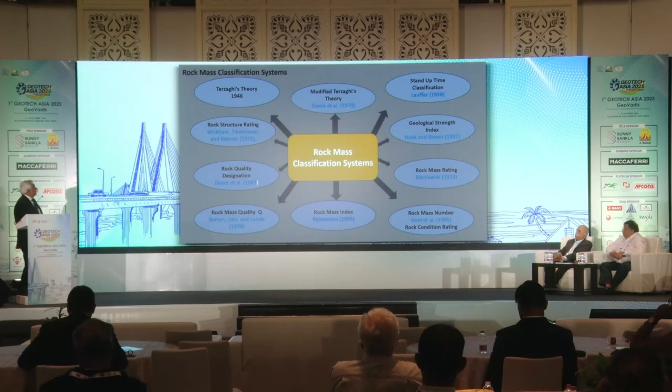You will find these are the prevailing rock mass classification systems, starting from Terzaghi's theory in 1946, and nowadays we are also using the geological strength index. So all these rock mass classification systems have limitations of one or the other type, because all the classification systems have been developed for different geology, different rock mass conditions. So we cannot use a rock mass classification system as it was developed for some geology or rock mass conditions directly to the Himalayan geology.

Especially, mostly we use either the RMR or the Q system, but in the Q system, it omits the stress reduction factor values for competent rock, especially in the moderately jointed rock categories L, M, N in the table. So there are different theoretical gaps.

Here in India also there are semi-empirical methods which have been developed by the Roorkee group, and we are using that for determination of the support pressure. So the key recommendation is there is an urgent need for region-specific modifications to the rock mass classification systems, and also validation of new theories.

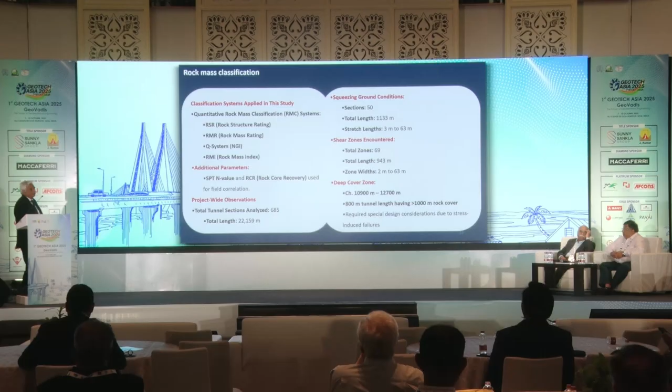Now, in this particular study, we have used basically the rock structure rating system, RMR system, Q system, and RMI, and also for the debris, somewhere SPT values or rock core recovery data are available, that data has been used. So the total tunnel sections analyzed in this case are 685 tunnel sections. We have done the rock mass classification and evaluated almost all the classification systems. The total length is about 22 kilometers.

Now out of these cross sections, there are 50 sections in squeezing ground conditions, covering a length of about 1.13 kilometer, and the length stretches from 3 meters up to 63 meters. There are shear zones encountered, so total zones are 69, and also deep cover zones, especially chainages between 10,900 meter to 12,700 meter, an 800 meter tunnel length varying. The rock cover is of the order of 1 kilometer or so, which required special design considerations due to stress-induced failures.

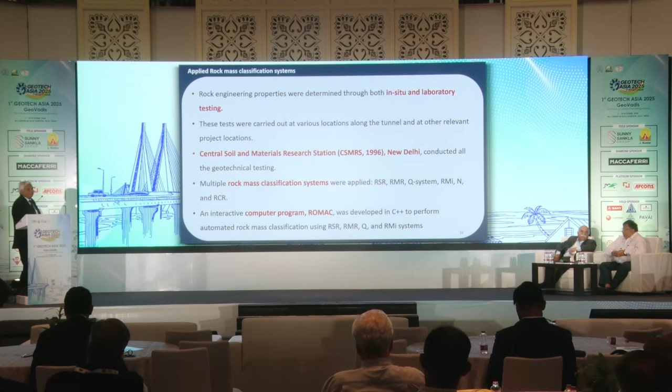Rock engineering properties were determined because in every rock mass classification system you need the rock engineering properties. These properties were determined through in situ and laboratory testing. The in situ testing was done by Central Soil and Materials Research Station, CSMRS, and multiple rock mass classification systems were applied. Since the data was used, an interactive computer program ROMAC was written in C++ for the classification systems to be used. So here RSR, RMR, RMI systems are used.

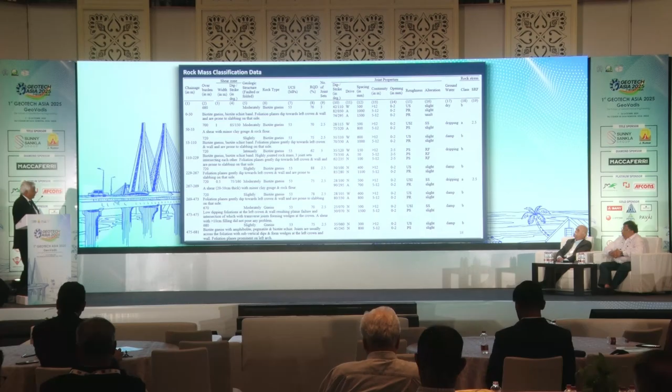There are different correlations available between Q and RMR. An exercise has been done to correlate different classification systems, like between RMR and RMI, RMR and rock mass number. In rock mass number, the only difference with Q is that we use SRF equal to 1 and the remaining parameters remain the same. So again, you will find n number of plots.

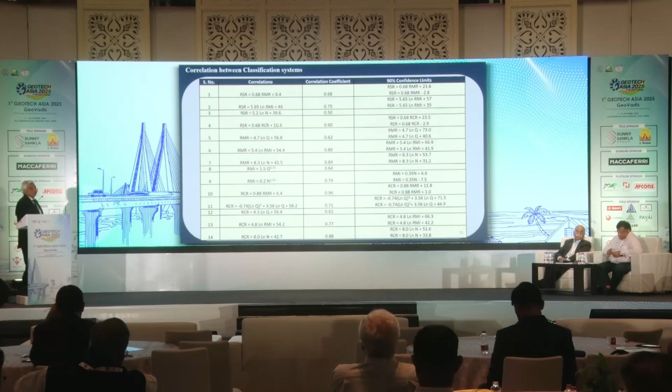Some of the correlations given here can be used with 90% confidence limits. For example, at number 5, RMR equals 4.7 times the natural log of Q plus 56.8, and such classification systems are available in some textbooks also. We have proposed that if you have information on one system, you can convert it into a different system and use it to determine the support pressures.

Even today, in order to design the support system, we make use of these rock mass classification systems, and then finally, when deciding about the support pressures or support requirements, we try to corroborate it with advanced methods like the finite element method or other numerical methods. We check whether there is any correlation between what we get from the numerical method and what we get from the classification system. If not, we can improve the support design.

We have evaluated the support pressures, and as you know, designing tunnel support is a highly complex task, chiefly because the geological environment is unpredictable. Extraordinary geological occurrences can come up, and whatever investigation program you use, there may be surprises that remain uninvestigated. So modern engineers often depend on empirical classification systems like the Q system to guide their choices of tunnel support conditions.

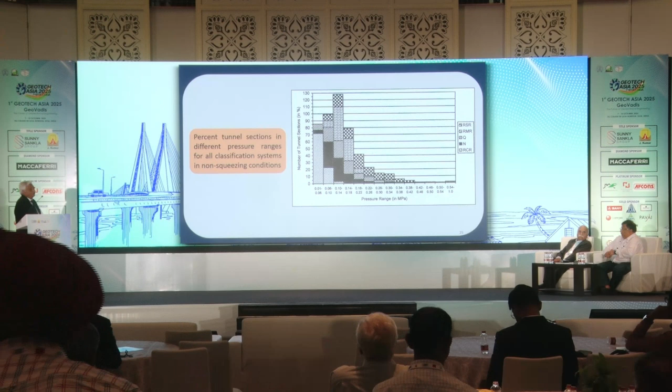Now similarly, we have also determined the support pressure for squeezing ground conditions. In squeezing ground condition, comparisons are also given here—RCR shows the highest, others are minor. RCR actually underestimates the support pressure in the case of squeezing ground condition. So for squeezing ground condition, the classifications assessed are RMR, Q, N, and RCR.

The RSR system is not applicable for squeezing ground condition. For RMR, normally we use it for slopes etc., but in some cases we also convert Q into RMR, and then RMR is used to determine the support pressure. So basically we go for the Q system.

In the case of squeezing ground condition using the Q system, we have found that 44% of sections fall in the category where we get support pressure of the order of 0.2 to 0.4 megapascal. So we have compared the different classification systems.

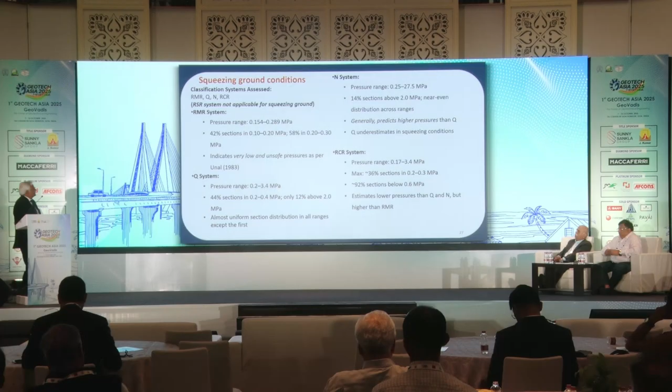Squeezing can be mild, moderate, or high. These are the support pressure ranges and the number of tunnel sections for mild, moderate, and high squeezing grounds, on the basis of RMR, Q, and RCR.

And what project authorities have provided as actual support—on the basis of these classification systems, they have provided the support system. So these are the comparative insights: RMR consistently gives low pressure estimates.

I will have to move a little faster since only 3 minutes are available. So the comparison here shows that P based on RMR is less than RCR, which is less than Q, which is less than the rock mass number (N).

Now, the crux of the analysis is that the SRF value used for moderately jointed rock does not give the actual value of Q that can be used for estimating support pressure in the case of the Himalayas.

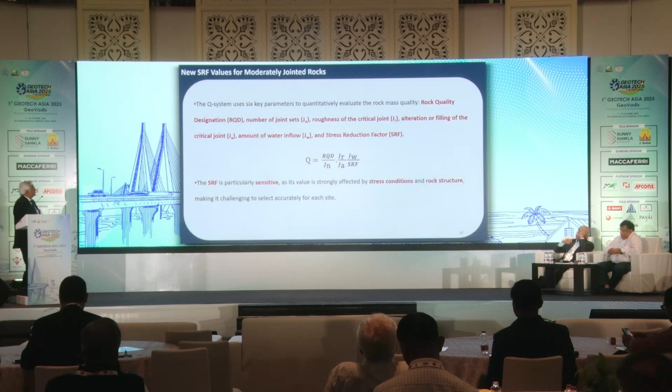So here is the SRF problem: in the Nathpa Jhakri tunnel, rocks were moderately jointed, incorrect SRF application was suspected, and overestimation of support pressure was observed.

So we used the classification system given by Goel et al., the rock mass number N with SRF equal to 1, and compared the estimated roof support pressures for these categories. The goal was to adjust the SRF input system for moderately jointed rocks.

In order to compare that, we again developed relationships and compared the roof support pressure obtained from Q with the roof support pressure obtained from N for different SRF values. The Q system gives that for moderately jointed category L, the SRF should be equal to 9.

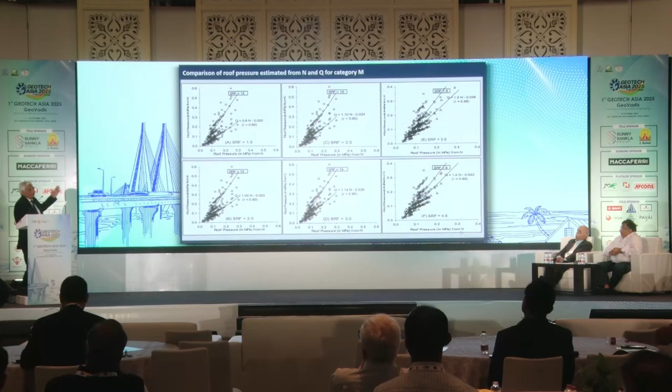So we did the analysis for different SRF values—finally this is for SRF equal to 15 for category M, and SRF equal to 20 for category N.

So we did the analysis and finally obtained conditions where P from rock mass number (Pn) is less than Q, Pn equal to Q, and Pn greater than Q. We obtained the maximum deviation, the standard deviation, and the correlation coefficient for categories L, M, and N.

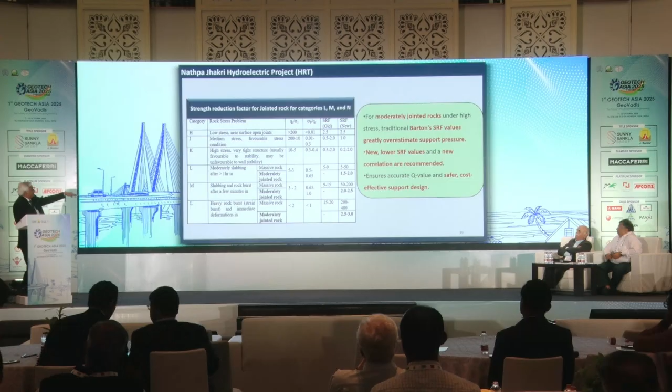Finally, we recommended that for categories L, M, and N, the original SRF values given by the Q system should be reduced—to 1.5 to 2 for moderately jointed rock category L, 2 to 2.5 for category M, and finally 2.5 to 3 for category N, against the original 15 to 20.

A computer program in C++ was developed. Then correlations between different classification systems have been developed. These correlations may be applied for Himalayan geology. We have estimated the support pressure, and we have given the correlation for SRF also.

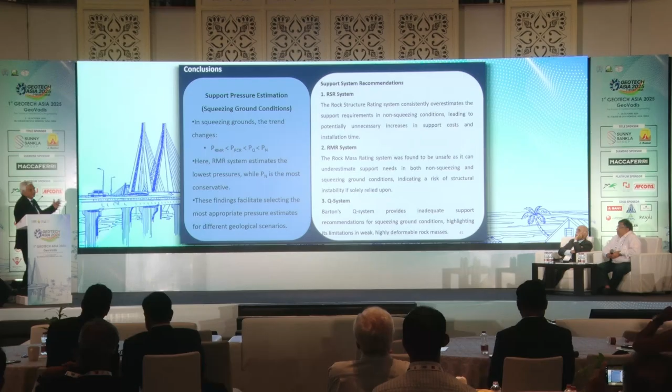In non-squeezing ground condition and in squeezing ground condition, we have compared the support pressures, and support system recommendations have also been given, with comparisons for different classification systems.

Finally, Barton's Q system does not adequately suggest SRF values - that is, the stress reduction factor - for L, M and N category. Through the present study, new SRF values have been proposed for these categories, improving the applicability of the Q system to the local geology.

I am happy to say that the Bureau of Indian Standards has also adopted these particular SRF values for the L, M, N category.

I would also like to thank Dr. Naresh Kumar. He is Chief Engineer, Central Water Commission, retired. He collected the data because he was in the Central Water Commission, so he had access to all the data which was available for the Nathpa Jhakri project.